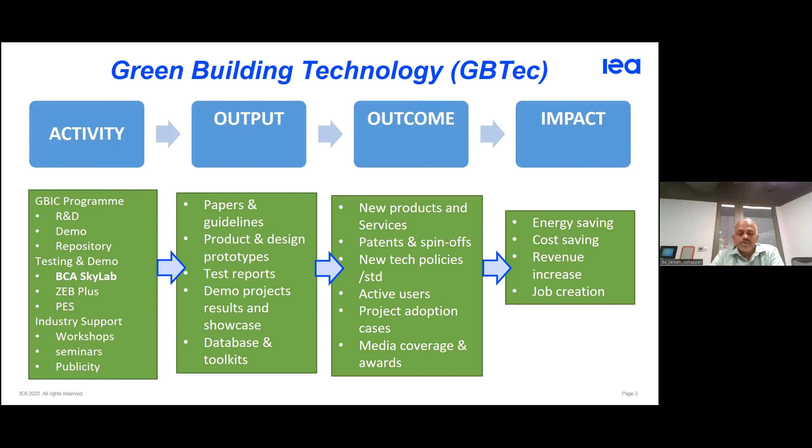So our outputs normally result in demonstrations in real buildings, and also showcases, so that other building owners and developers will implement it in their own buildings, so that Singapore as a whole can move towards the net zero target that we are also working on.

So moving on further, it's about the BCA Skylab. BCA Skylab is basically a comprehensive plug and play facility that can test for energy efficiency in real outdoor conditions, and it has over 200 precision sensors. This has been modeled after LBNL's FlexLab to test technologies in the tropical climate.

This Skylab is instrumental for us to evaluate how technologies work in tropical conditions, because we do see some technologies that work in the temperate climate, but when it comes to the tropical climate, they have to undergo certain adaptations or changes in the methodologies of how they work, so that they can be used in local buildings. And it also supports BCA's goal of 80% improvement in energy efficiency.

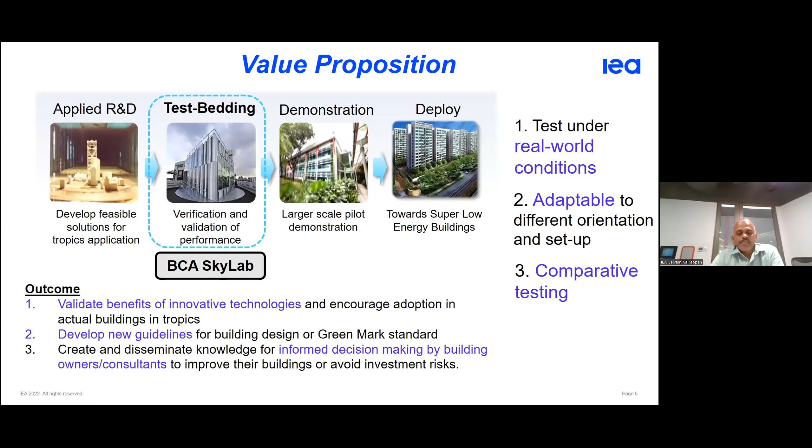Because here in this testing, there are no assumptions. Everything is practical, measured data, which proves how the technology works and what type of adaptation needs to be done in order to enhance its performance.

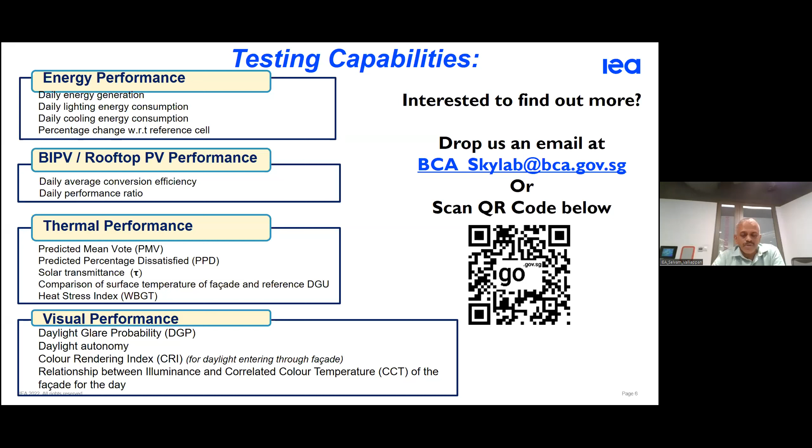So as I mentioned earlier, this Skylab was developed in a technical collaboration with LBNL's FLEXLAB. So it's a lab that is used in tropical conditions to evaluate technologies that can be used in Singapore. And it is able to test in 360 degrees. The lab is capable of rotating 360 degrees so that we can test technologies with respect to certain orientations or even with respect to the solar movement.

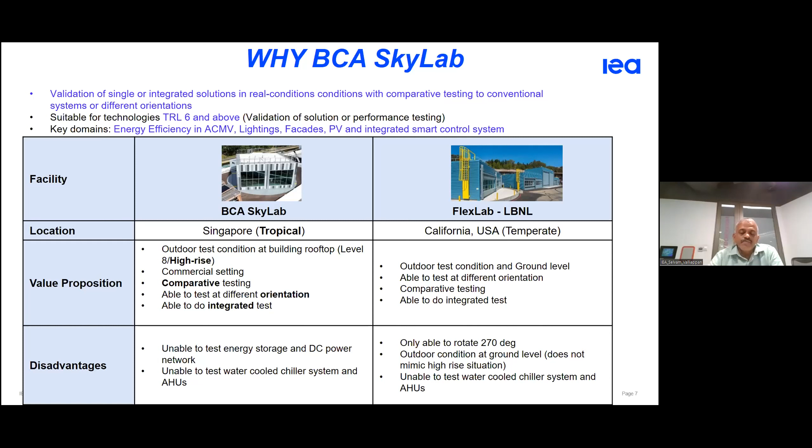So even though we have high-end technologies, there are certain areas that we may not be able to do. Something like chiller systems or AHUs cannot be tested or compared here because the space is only like 40 square meters. So in those areas we are still at a disadvantage. But other than that, we are able to do testing in air conditioning, lighting, facade, PV, or integrated smart control systems, and later on I will be explaining some of the technologies that we have tested so far.

So who can benefit? Basically building owners, developers, researchers, technology suppliers, because sometimes the technology suppliers find it hard to enter the local market. Singapore is a hub where if they prove it in local conditions, then it is very easy to reach out to neighboring countries like Malaysia and Indonesia. So we provide the testing and also support demonstration so that when it goes into the real building, the technology will talk for its benefits and spread through the region, making it easy for them to penetrate the local market.

And as policy makers in BCA, we can also use this to see to what extent we can lift up the energy bar, push up the energy bar, for whatever we make minimum or mandatory. It is not just by assumptions, there's a lot of data behind it to come up with the policy decisions. So Skylab is one of the areas that helps the policymakers within BCA to come up with the guidelines.

And what are the benefits? Basically, it's improved insights, and it is also BCA and Singapore Green Building Council recognition. Based on our test reports, BCA and the Singapore Green Building Council are able to recognize and provide certifications, and it is also verified under real world performance. So if it performs in the lab, it should perform in the actual buildings when it is implemented, because there's no simulation or assumptions in these scenarios.

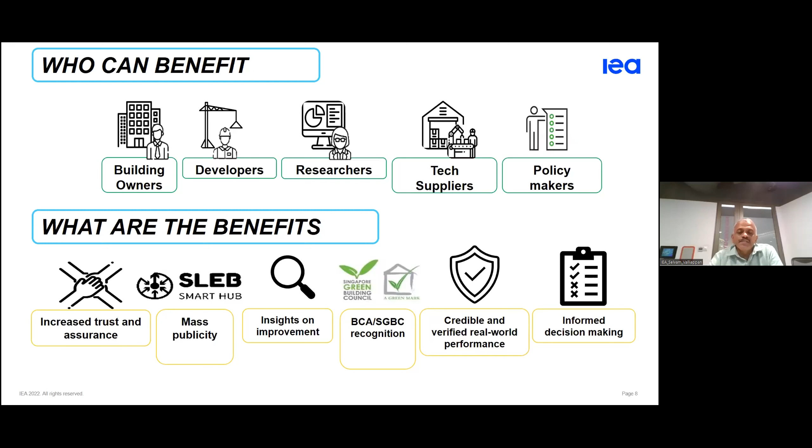So what have we tested so far? There are many technologies we have tested, but I'm just listing a few in relation to the topic. So one is the smart damper. Basically, it is installed in all the aircon ducts in the Skylab test cell, and it is an AI-based demand control ventilation for fresh air and temperature or occupancy-based recirculated air control. It can achieve from a low airflow to a very high airflow based upon static pressure control as well as AI support, to achieve energy savings with no compromise to the occupants in the space.

And the next one is model predictive control, which Adrian also mentioned just now, which we used before in 2017 or 2018. We have tested our MPC, because in most buildings, and there were also a lot of questions just now in the chat session: is the temperature 27 degrees? Is that too high?

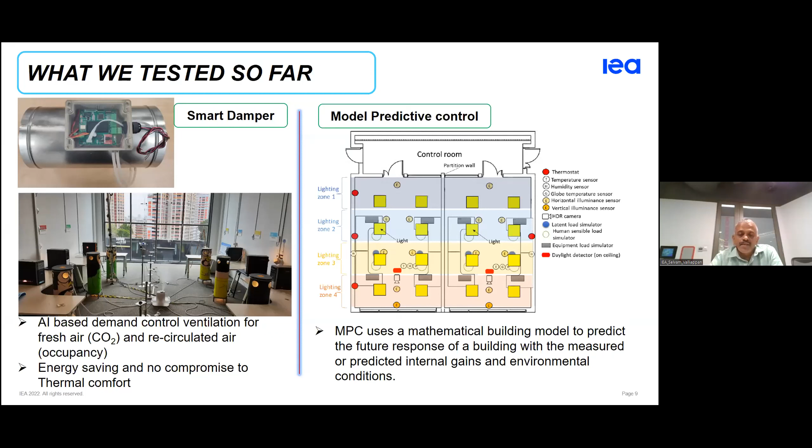So we should change the mindset from just the temperature setting to a thermal comfort setting, so that the system will perform and adjust accordingly to your temperature and your air velocities to help achieve thermal comfort. At the same time, it enhances the saving potential in the building depending upon the ambient conditions. Then the other one is the passive displacement coil.

So instead of using the air-conditioned FCUs or AHUs, we have tested out passive displacement, where there are no blowers inside to push the air. It uses the natural buoyancy effect of the air, like warm air rises and cold air sinks. We have seen good thermal comfort achieved, with reduced energy consumption. We are currently developing a technical guide so the system can be used in Singapore to push the boundary of energy efficiency.

Then the other system that we have tested is the advanced carbon capturing system. This was tested by professors from SUTD, where they have some films to capture the CO2, compared across two rooms where CO2 was released at the same level. You can see the graph shows that in the test cell the CO2 level in the room is substantially lower. And the interesting part is this absorbed CO2 can subsequently be released to the plants, which can absorb the CO2 to grow better.

So it is not just that you absorb the CO2 and release it outside. That's not what we are looking at, because, as I mentioned earlier, we want to see the overall outcome and impact of the technologies we test in real application. Once you absorb the CO2 in the buildings, and over time when it's saturated, you release it to the plants, that makes plant growth better, and you also reduce the energy consumption in the building because of the lower CO2 in the buildings.

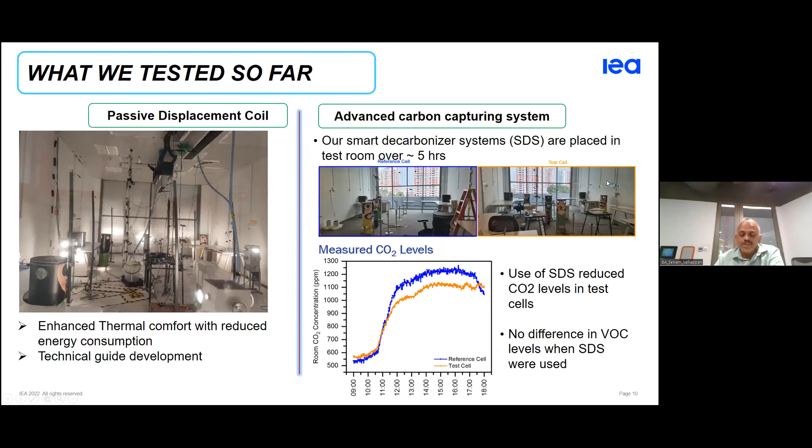Then the other testing that we have done is the desk fan, where the desk has aircon that the user can adjust according to his own preferences, and occupancy sensors are used to stop the airflow if no one is occupying it. It also results in low noise level. So we find this is the way to move forward, and we incorporate this technology into the mixed mode ventilation that Professor Adrian was sharing about just now. And then the next one is the anti-thermal paint.

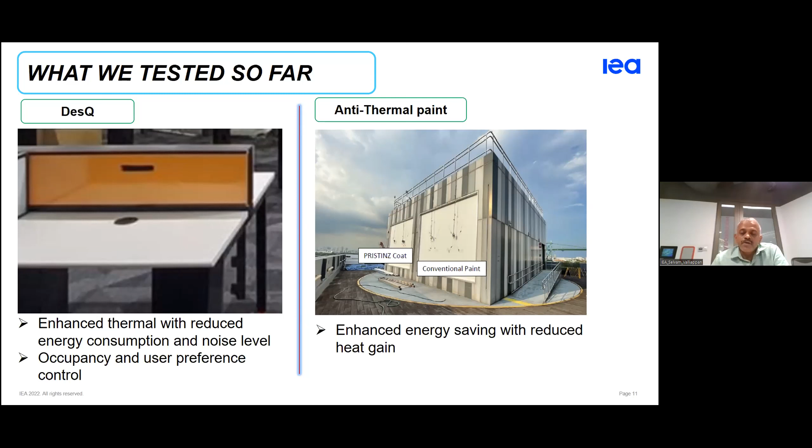Earlier in the second slide, I showed the lab with the all-glass facade. Now you can see the entire facade with concrete, tested for the anti-thermal paint. As I mentioned, it is a plug and play concept. The facade, the lighting, the aircon, the plug loads, the layout, the orientation, the controls, everything is plug and play, so multiple technologies can be assessed individually or combined. That helps developers and building owners make informed decisions.

So normally, before we do any testing, if you have a technology to be tested, the first question we ask is, what are the questions posed by your customer, so that we find the answer through our measurement capabilities. From there, we decide what parameters need to be tested, and we go through the detailed test procedures and methodologies, all according to the standards. Then we do the testing, and define the roles and responsibilities and monitoring period.

And it's not a black box. During the testing period, the tester can see what we are testing and how, and it is also open to the Singapore Green Building Council, so they have visibility of what and how we have tested. That helps give them the green product labeling. Finally, it comes out with a final report that is shared with any potential users of these technologies.

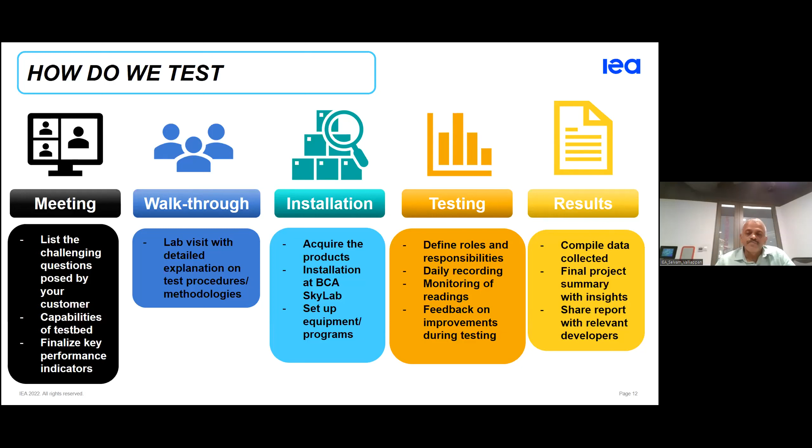Because in BCA we are not just interested in testing more technologies. What we are interested in is seeing how these tested technologies can be scaled and adopted in real buildings. That's why we need to get the first question right, like what challenges the technology faces before applying it in the real building. Then we answer that through our measured performance, which helps the technology supplier get into the market much more easily. So now, I was asked to share some of the technologies.

So I'm sharing the results of this smart damper, which I explained earlier. Basically, this smart damper can do online air balancing. That's the key capability of this technology.

In a building, initially when it is commissioned, they do an air balancing. But over a period of time, when the building usage and settings change, nobody cares about the air balancing anymore. So some areas end up feeling hot, some too cold, because the air circulation within the building is not maintained at the same level it was commissioned for, due to new partitions and other changes.

For example, in an airport departure hall, if there is no flight, the hall may still be flooded with aircon, whereas with this technology it can be synchronized with the departure timing, so that 15-20 minutes before, things can be operated accordingly, and users in the departure hall may not even know the space had no aircon before the time started.

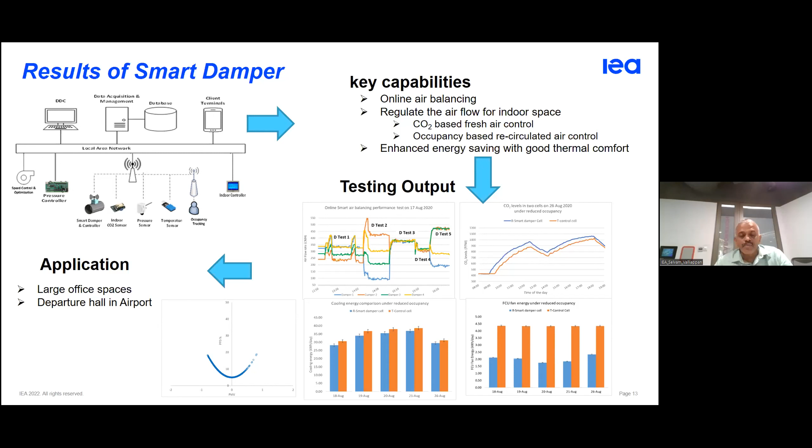The U curve on the left side indicates thermal comfort, PMV versus the PPD curve, predictive thermal comfort, which is well within the range of good buildings. So it can be applied in large office spaces and departure halls.

Temperature at 25 degrees can achieve the same comfort as temperature at 24 degrees with the DesQ systems. This shows how managing the airflow within the building space brings up comfort levels at reduced energy consumption and also reduced noise levels.

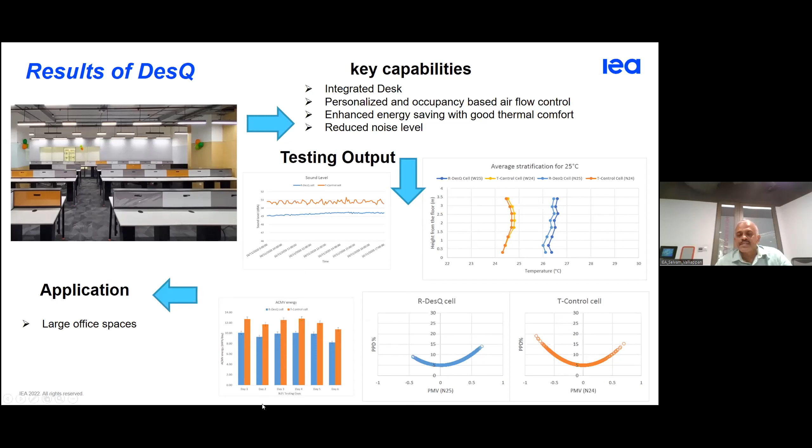As I mentioned earlier, for any job we do, we are more interested in the net outcome, not just the output of our lab. We tested for a film, and I shared some of the test results on the screen. I'm not going into detail on all the results, which is not a priority for this session, but after the test results it has been applied in many buildings in Singapore, supporting the 80% energy efficiency improvement that BCA is looking at on a larger scale.

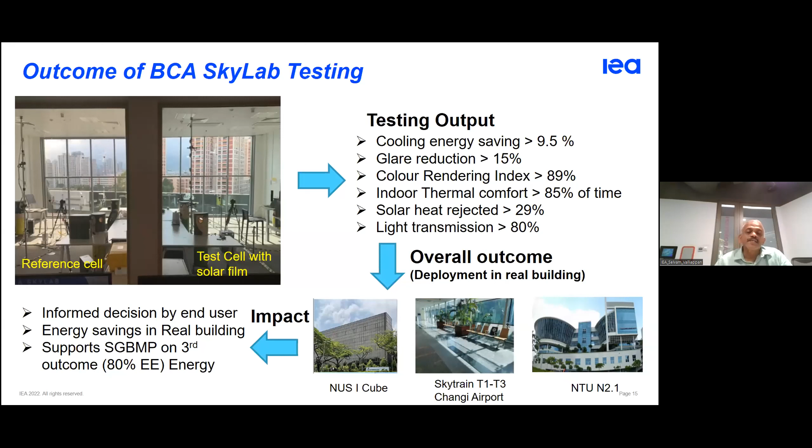Similarly, for the core painting we tested, Singapore Green Building Council gave them 4-tick, the highest ranking a product can get as a certification. It has now been deployed in 5 buildings in NTU, and they're also expecting more orders outside Singapore, which we are happy to see, because what interests us most is developing our local SMEs in this sector.

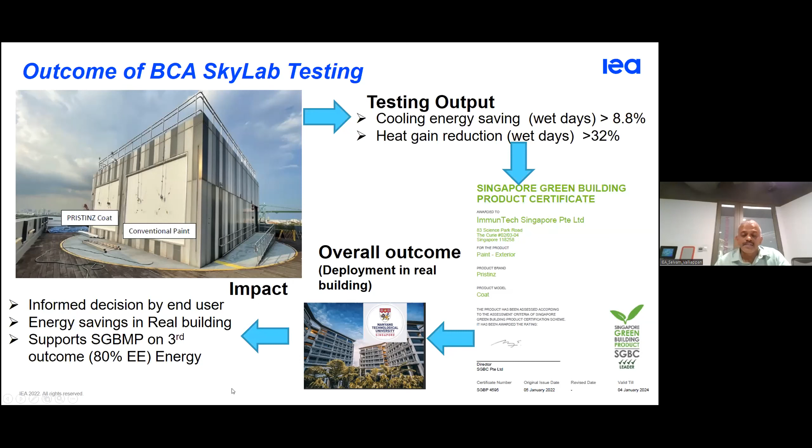Moving forward, we see there's large potential, that's why we are coming up with a BE Innovation Hub. There are 2 new buildings coming up in our BCA Academy, which will help accommodate more innovation technologies and bring more technology partners to work together with us in a bigger way, to improve the built environment, innovations, and energy efficiencies.